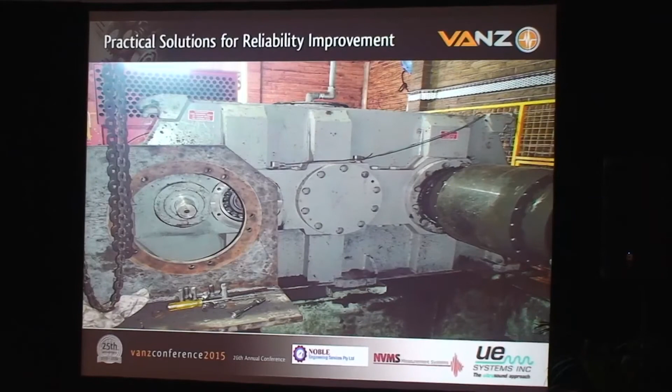But a little bit about the gearbox itself, and the reason that I put this drawing up is because, depending on where you're at with your capability of condition monitoring or vibration analysis in particular, how much understanding you have of machinery is extremely important. I think it was touched on a couple of times today that to have great success with our vibration programs is having a unique understanding of the equipment that we're working on.

So for the average analyst here, we obviously see there's an input shaft here. The gear is one piece with this shaft. We move on to a second shaft. We have a gear, smaller pinion there, one piece all the way through. This gear here is pressed and keyed, and as you can see, all the way through the gearbox. So we have intimate knowledge of the fits and tolerances.

We need to know all the bearing details so we can work out our fault frequencies that are associated. We need to understand our gear train, whether it's straight cut, helical cut. We need to understand the teeth numbers. So we can actually build an appropriate analysis parameter set, if you like, to come up with good data.

Again, we're measuring things, so we want to measure things properly so we can table information when we have a problem. A lot of the time when we're tabling information, sometimes CM consultants I come across haven't provided enough information to have the leverage that they need with the decisions that they want to make. We'll talk a bit more about that later. So good understanding of our machinery is paramount for programs to work well.

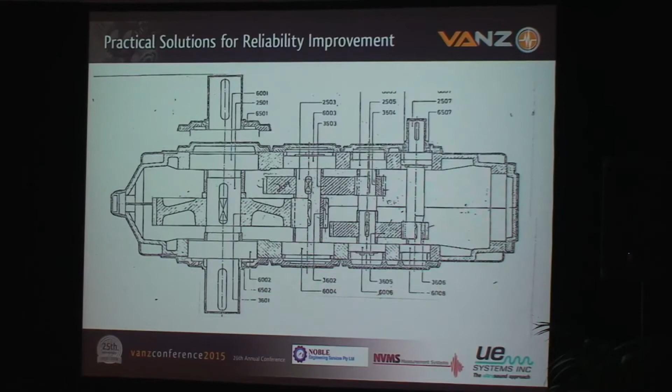And I assume all you guys are super experienced and you know all that, so bear in mind that this might be new for some people and it might be well and truly old news for most of you guys here. So what was the process of events and evidence that led up to a problem with this transmission? Well, I'll give you some advancement on where we're going to go with this.

This was a transmission that regularly gets surveyed once a month, unless there's any particular issues or anomalies that have shown up, and we obviously shorten those frequencies up. But in the process of this transmission getting done regularly, there was a significant change in the data which we're about to look at. And that data ended up identifying a problem which was a major component failure within the gearbox. But at first, what you're going to see now is the fact that it wasn't so much an easy decision.

So the first variation that we had, and these aren't ranked, like we didn't see anything in the VA first or anything like that. This is just how the script is rolled out. In the month of December, only just last year, one of our guys reported and noted that the gear mesh frequency in both the waveform data and FFT spectral data showed significant amplitude increase. That was our first change. Remember, we're talking about measuring and managing. So there was a first change and there was a variation there that was quite considerable. Let's have a bit of a closer look.

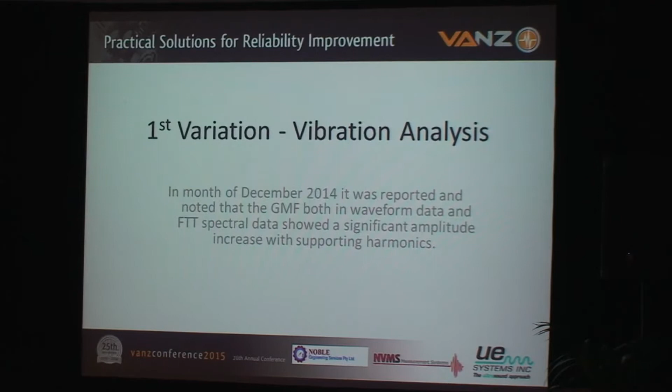Sorry, I just have to come out a little bit. So obviously, see here, I've made it nice and simple. I haven't put heaps of data in so we could actually see what was happening a little bit. Let's take it on the second shaft, around 830 RPM. So we can clearly see in history, this is going back to October, and that was November, and this is December, the month where we saw a significant change.

Historically in this gearbox, we can always see the second shaft gear mesh frequency quite clearly, even in velocity, and to a lesser extent, the input gear mesh frequency. Just prior to this, and that's data that I haven't got in there, my apologies, we saw a change with the side banding that was occurring at the input gear mesh frequency. So we've seen a change in the side banding, which was actually half times. I think that'd be about 7 hertz. Because this speed is 830, so that'd be about 14, maybe 13.8 hertz is the frequency for that second shaft.

So having all the data and all the information that we need on board to make accurate decisions is pretty straightforward for people who've been doing it a while, but maybe someone who's newer into the industry, you're trying to think, how do I understand more about what's happening in this gearbox? How do I understand whether that's load related? What if that's just load? What if it's nothing else?

These are massive transmissions. You get a data change like that, you don't ring up and say to the colliery, look, you need to pull that transmission out. We've had a doubling of the amplitude in a couple of the gear mesh frequencies on both the input and the second stage.

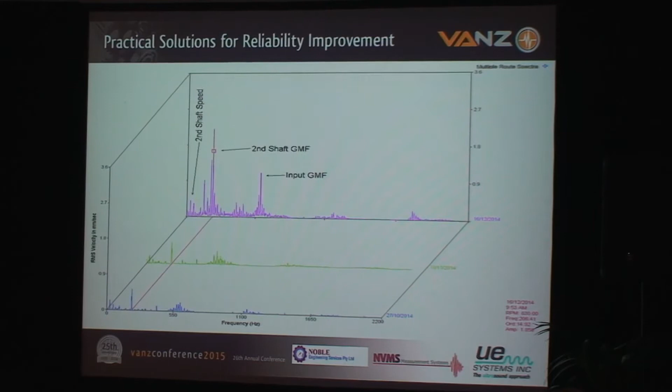We need some more information than that. Just go a little bit further. Obviously, we saw some impacting even in our waveform at quite significant levels. If you were to audibly go into this, what you call drive house, you couldn't hear any difference to the gearbox. No one suspected anything. Even our analyst said he goes there all the time, and audibly there was no change, but obviously in the data there was change. There was significant change.

These are the previous months, just prior. That would have been October, November. There has certainly been a step change in December. Something's actually occurred. At this stage, we don't know what. We're obviously reading the results of what's occurred, but we actually don't know the detail yet. Let's go a little bit further.

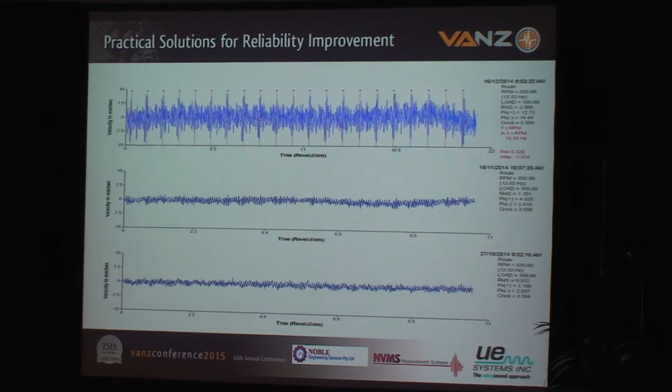So obviously, we wanted to have a look at the bearing associated with that second shaft. No particular fault frequencies indicated. I just put that up in there so you can see how you would overlay something. Again, some simple stuff, but I'm amazed sometimes at some audits that we get involved with in Australia. Some things that are so simple don't get done properly and don't get done well.

I was only talking to a guy a couple of months ago, helping with some analysis, and he'd been working on a site for 5 years, a guy who worked internally in industry. And when looking at a problem that he couldn't understand in his data, I said, mate, what's the information that you have on these transmissions? Oh, I don't have any. The OEM never really gives us that information.

We dug a little bit deeper and talked a little bit longer, and then he said, oh, about 12 months ago the transmission came out and was overhauled, and that's what I'm really worried about. We've seen this change about 12 months down the track, and I wonder whether they've done something wrong. And I said, well, you've told me you've been here for 5 years. You still don't understand what's actually in the transmission. You've got no idea of the bearings on each shaft to calculate fault frequencies. You're not sure of the gear teeth numbers or the gear train, but yet the gearbox was overhauled. Why weren't you there? Why weren't you looking?

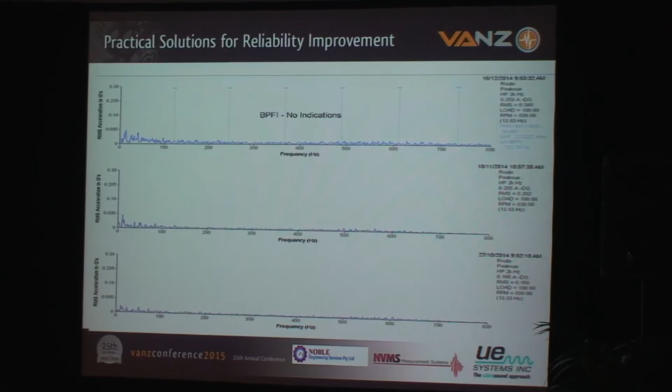A second variation was our thermal imaging. We conduct regular mechanical thermal imaging on these drives throughout the coal mine, and some good information came out of this as well. Over the years, I've been told that mechanical thermal imaging is of no real value, but there's always value in all the disciplines that we have. And here this week, we've got various vendors that sell excellent equipment. All those pieces of equipment help; they're all tools, and they complement one another to give us good evaluations and good understanding of what's going on.

So what did we see in that same month? It was reported and noted that one bearing position on the second shaft had seen an increase in the body temperature of about 30 or 40%, with a concentrated temperature around the bearing position. Let's have a bit of a closer look.

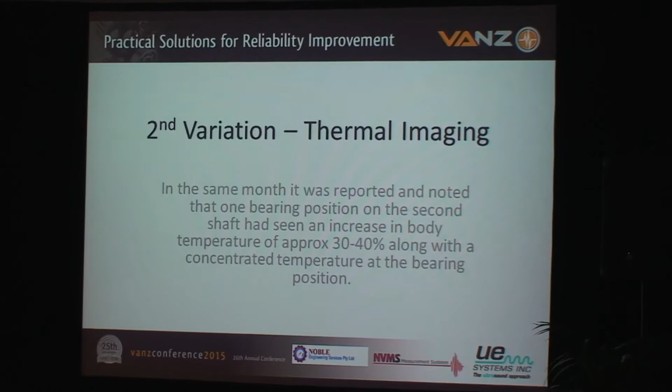This first image is not the image that has a problem. The temperature that we're normally seeing around that second shaft there is normal. We take these images every month, and they're logged and kept for reference purposes as well. There's also another data run sheet, but it's pretty normal that the bearing position was 82 degrees. It's pretty regular, fairly stable, never really changes. But on the other side, the side of the problem, let's go to the next slide. So we had a good reference there of what we normally see for temperature.

Doesn't look much, but we've seen here we've popped up to around 112 degrees. So there's been a significant increase if you were to talk percentages. But again, large transmission, big drives, no one seems to worry about this sort of temperature in itself. But it's the increase that was a concern. And what was quite odd was on one side, I think I can go back.

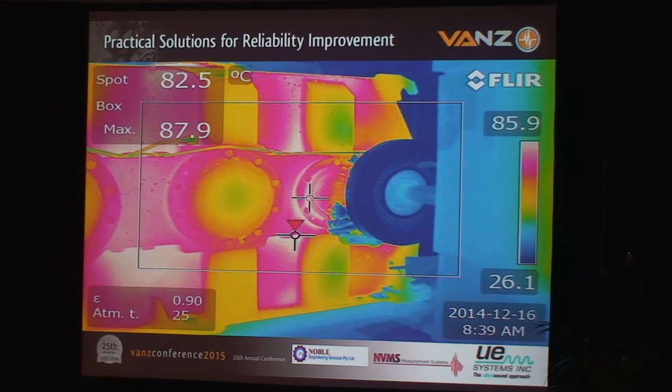You want to go back one? There we go. Remember, on one side we have 82, and that was consistent. This is the same shaft. But on the opposite side shaft, we go to, just had it, there we go, 112. What's going on? Why a change there? Why a change in that bearing position?

Now, let's think just a little bit deeper what's actually happening there. A fairly simple equation that I could think of for thermal energy is probably friction, load and velocity. And so we know that in a transmission, that second shaft, the velocity won't be changing at all. It's fairly constant, other than when it slows down and it starts back up. So the friction load has changed at that bearing position for some reason. Doesn't mean the bearing's worn out. That doesn't give you an indication. But the load has changed.

Our first concern was, had there been something moving in that shaft, in the sense that had that whole assembly slightly moved off and that bearing might have been in a little bit more preload. That was the first assumption. Something that was running around in our heads anyway. Let's go to the next slide.

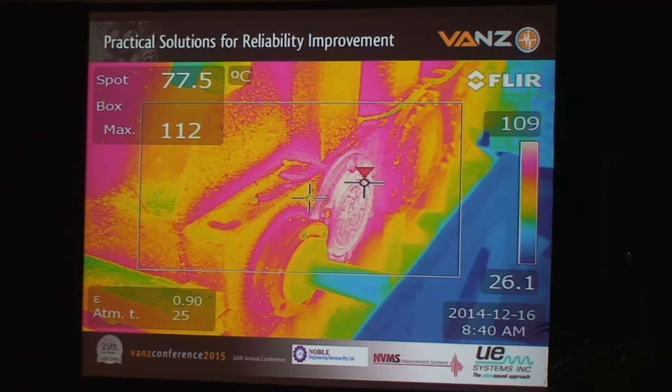Third variation, oil analysis. Again, another great tool that we can use, and the review of the oil analysis data at that time indicates an increase about 3 times, sounds pretty dramatic, in the ICP, or the spectral results, parts per million. ICP is inductively coupled plasma. I think that's just a particular method that's used. And the PQ index. I'm not sure if you know the difference between the two.

ICP or spectral results for parts per million will always be particles probably well below 10 microns, probably about 8 microns and below, for all the equipment that we use. And the PQ index is normally indicative of particle sizing about 20 microns and up. So let's have a look.

We've seen smaller particles increase, we've seen larger particles also increase, and that started in November, actually just prior to where we saw a significant change in the vibration data. So again, all this information, all these measuring tools help start to form a decision going forward. It's all important. And in December again, it increased one more step change. Let's have a look.

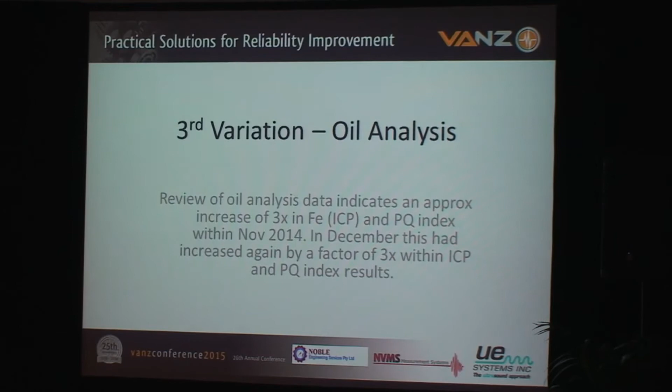I've just grabbed a couple of older points rather than have a whole heap in there and then change the graph. But even right back to February in that year, through to July, and then October when we have that other vibration data, chucked in a point there. So reasonably stable in all results. We actually take 2 positions on these transmissions because historically we've found there's just a bit of inconsistency from one end of the box to the other. They're quite physically large. And as soon as we get into November, we start to see a step change.

I think that would be the iron. So there's the ICP results starting to accelerate north. Just lagging behind that, the larger particles, so smaller particles getting produced, larger particles starting to get produced, and look at that, they even accelerate at pretty much the same rate. So we've seen quite a step change.

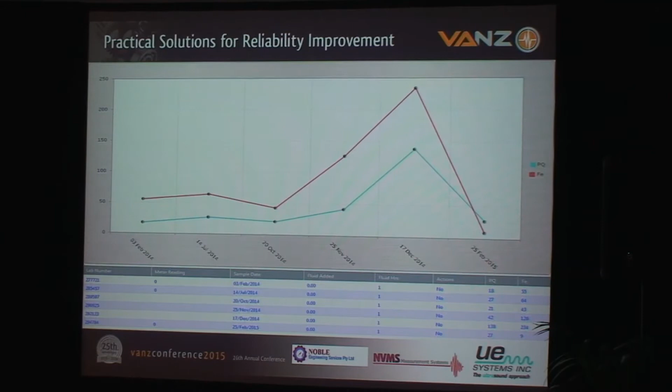We've seen a change in the vibration data, in the gear mesh frequencies that is. We've got side banding at that shaft speed and half of that shaft speed, so it's implied there's some looseness there. Something's going on. We've got material being created in the oil. We've got an odd temperature increase on just one side of that shaft position. That was a bit of an odd one. That was a bit different. That was causing us to scratch our heads.

So the concerns that were raised, our first concern is that, well, maybe the geometry or the gear condition has to have changed. I mean, this is basic textbook stuff. You learn this in level 1, level 2.

You know, we've had an increase in gear mesh frequency, so something must be changing to the gear condition, or something must be changed to the geometry of the addendum and dedendum as the gears interface. You're getting that sort of change in amplitude in these sidebandings.

Our second concern was the friction that's increased in that bearing position. That was a little bit trickier, a little bit less textbook, but we know that to increase the body temperature, we've obviously increased friction there somehow. What's going on there? Has the preload on that bearing changed? Has the bearing shifted in its position somehow?

And our last concern was obviously we could table the fact that gear or shaft material is indicated within the oil compartment. There's nothing else it can be. Gearboxes are fairly simple. So these 3 concerns are raised.

And what's good about having a range of concerns like this when you're actually about to move into making a decision for your clients is that we've got data, we've got information, and we've mentioned that a lot today. You know, we've got history, we've got accurate trending. I mean, all these things are basic tools, but you'd be amazed at how often they're overlooked.

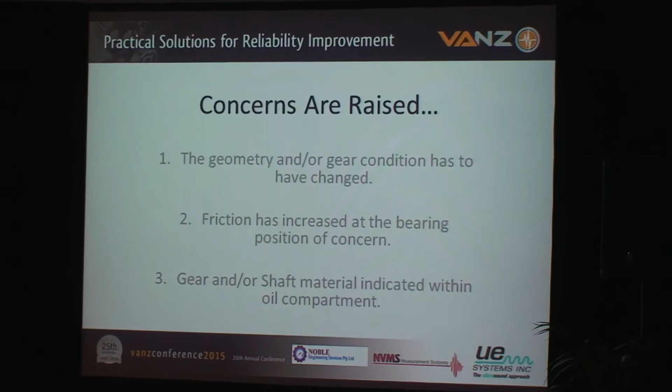So the next point to move was really, let's go to a visual examination. There was an OEM getting involved now because there's a little bit of information I haven't told you, but back in 2009, this gearbox was overhauled. We'd picked up gear degradation in this gearbox, in this position, once more, and we've got a reoccurring problem. It all sounds pretty straightforward.

So let's get the OEM up and we get our site representative there, and we're going to not pull the gearbox apart, but just have an access position to look inside and point and show what we've got wrong with it. Too easy. So what we thought we'd do is internal inspection, have a look at the gear profile, assessment of the shaft position if we could do that. We're trying to visualise that. We're going to do some backlash readings as well.

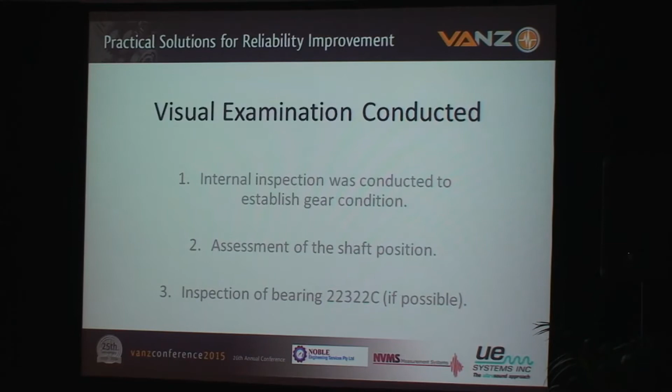We had all that gear, and due to the size of the unit, we could pull a side plate off the bearing cap and do a limited, or if possible, inspection of that 22322 bearing, about a 110mm shaft that it would fit onto. So we had all the equipment. We had all the data, our vibration data, our thermal data, our oil data, all these concerns we're tabling, and now we're going to stick our head in and see what we can find. Oops.

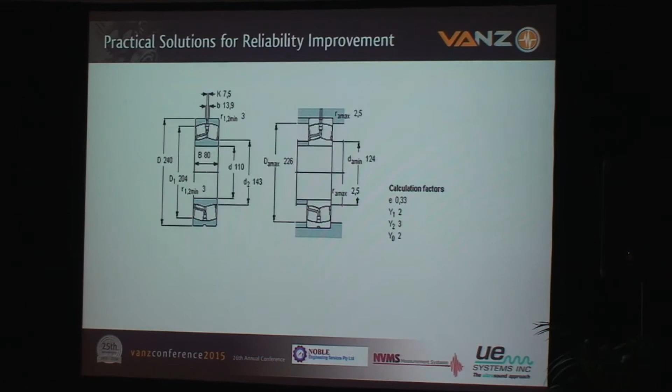So when we first start looking at the bearing, it's one good thing to have a full understanding and appreciation of the clearance in the bearing. This image doesn't talk about that, but I just chuck that in so you can start thinking it through. We assume internal clearance on this bearing would probably be 0.11 to 0.14. That was actually assessed, and we had a look at that while we were there. And that's just an image there to give you an idea of the access that we did have.

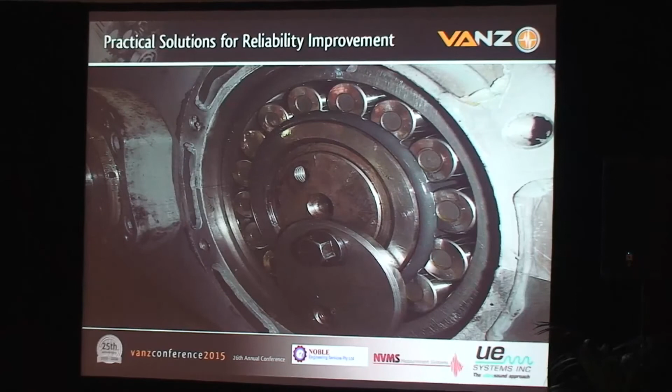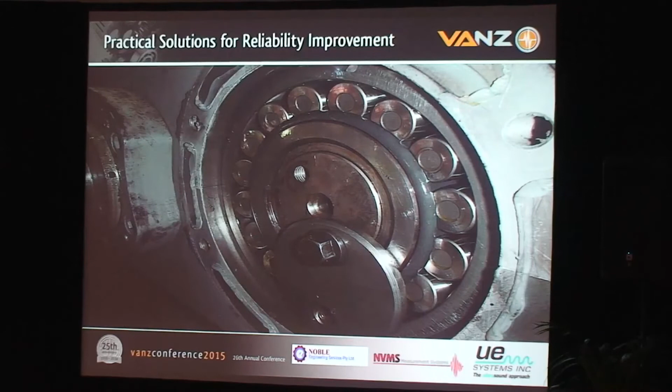We had the opportunity to put our very fine little endoscope that has a 1mm end just in here, have a look around inside. We didn't feel that there was going to be any bearing anomalies occurring because the data wasn't telling us that, but you know, doesn't matter how old you are and how long you've been in things, you don't just make assumptions. It's good to double check. We checked all this out, everything looked fine with the bearing. Moving along.

I think this might need a battery. I'm having the same problem that Chris had, I'm sorry.

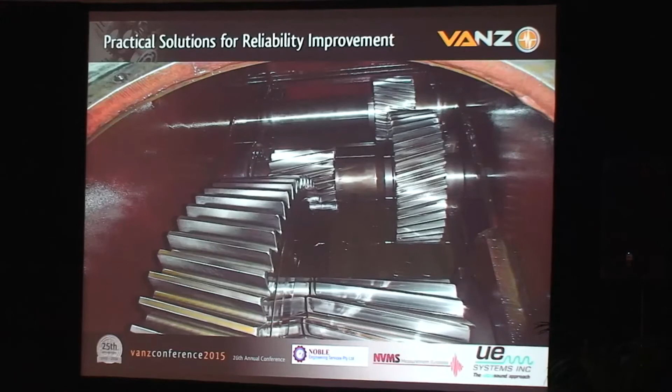Now, please note that this shaft has moved. We physically moved that shaft. It wasn't found like that. So if you're looking at that and think, crikey, what's going on? The bearing's sticking out. You're dead right, but we did that. That wasn't like that. So yeah, look, we had a look around in the gearbox, had a look at all the teeth, did some backlash checks that we were able to do physically. Not the sort that you would do in a workshop situation, but we needed to get to the bottom of this.

Everything looked fine. Hang on. The data's not saying that. You know, do we throw that out? Do we stop trusting the data that we're getting from our vibration sensors? Do we stop trusting the data that we're getting from our oil analysis, from our thermal imaging?

You know, this is all telling us there's change. We're measuring things right. We're doing things right. What's going on here? We're starting to walk away with egg on our faces. An OEM's been brought up for a couple of hours. They've had a downtime window, which we've asked to extend, and everything looks fine. What's happening? Who's ever been in this sort of situation where you really start to second guess?

And at least you're honest. Thanks, mate. No, it was getting a bit concerning.

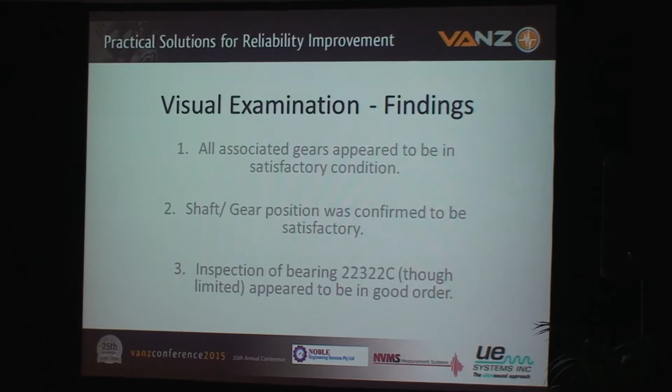So what did we find? All associated gears appeared to be in satisfactory condition. The shaft and gear position was confirmed to be satisfactory. Inspection of the bearing, although limited, I admit, appeared to be in good order. So a decision's needed. What are we going to do? We're going to continue in this vein and just do some more regular testing and continue on, maybe at a more frequent interval, to see if there's any more changes occurring.

That's a really good suggestion. We've thought through that, and you guys are probably all thinking that already. But trouble is that this happened to be just a week outside of Christmas, and there was a week's window of opportunity to change this transmission out if there was a problem. And the pressure was on to make a decision if that was the window, because in these coal mines in Australia, they budget 97% availability.

Someone here was speaking in a presentation, they mentioned that they were impressed with having 96% availability, and that is good. But these guys who aren't engineers and aren't mechanical, their production, they actually budget that this thing's going to be going 97% of the time. So there was a fair bit of pressure on us as a service provider to provide the right answers, to provide the right direction, and no different for you guys, whether you're in a service company or whether you work in-house. At some stage, a decision has to be made, and what does it require to make the right decision?

So all associated data across each technology was indicating significant changes. Downtime for that pit was about 100,000 per hour. So I didn't want to leave it in just on a whim, on what the visual examination brought to us, and then find out that in 2 or 3 weeks' time something's let go, because another gearbox had to be sourced. The OEM, and that's the overhauler that did the overhaul back in 2009, which is really not that long a time frame for a transmission. Originally, these transmissions would have been there for 40 years.

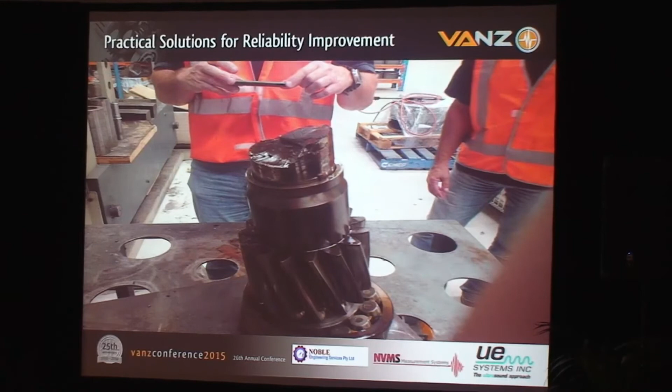Let's go to the next slide. I'll try it here, Simon, see if that works again. No, I'll have to get you to...

So you can see the fretting that's been occurring in there. Without going into too much detail, that cracking has been occurring over a long period of time, starting in the keyway edge. Data was telling us everything right. Just because we couldn't see it doesn't mean there wasn't something going wrong. So this created a much larger investigation, which we're still in the process of, that we're involved with for our client and with the OEM.

But it appears that there hadn't been adequate fit of that gear on the shaft. It's been working in the keyway, cracking, so low stress, high cycle fatigue cracking is starting to occur.

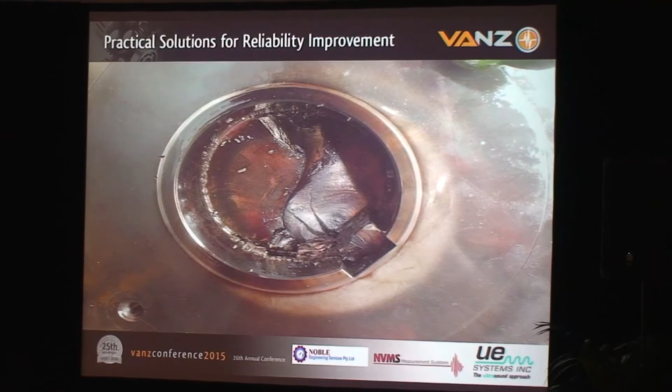It worked. So what did we learn? Because I'm conscious of time, I wanted to speed through for you guys. The data was indicating everything correctly, giving good information.

This is something that right at the beginning I wanted to ask all of you guys that are involved in CM type programs, whether you're hands-on or whether you manage it: are you assured that all the data that you're collecting is good? If it's good data and you're trending things properly, it's something you can trust. If you're collecting rubbish, obviously it's not good data, it's not good evidence. Because before tabling a problem, the more good data that we have, the more stuff that we're measuring, it gives us confidence in our decision-making process.

With that gearbox, the information that we had, we knew was good, and we had overlapping of different methodologies. So all data methods were complementing. That was giving us that sense of confidence that there is a problem within this transmission, within this drive, even though we couldn't see it.

Also, I wanted you to think about the importance of accurate trending. There's lots of facets, and some have been mentioned today actually, which can upset trending. You need a consistent approach, whether you've got remote accelerometers on machines or portable analyzers, ensuring that the magnet size is the same, so your mechanical filtering at the low end is not different, like accelerometers, like sensitivity, at least in range. There's lots of little factors that can really influence good trending.